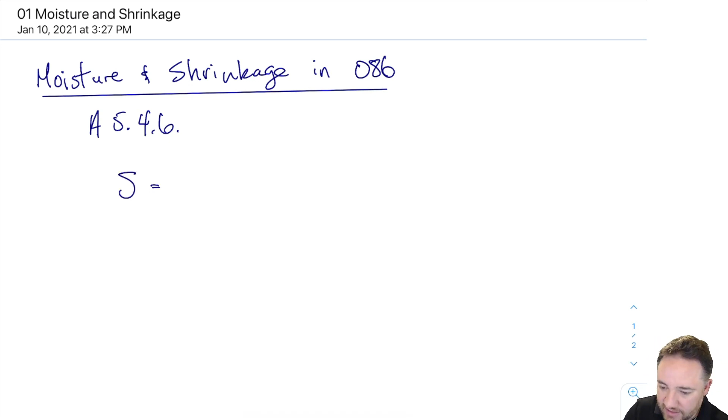But in order to calculate wood shrinkage, we use this very simple equation: S, which is the amount of shrinkage, is equal to D times (Mi minus Mf), which is the change in moisture content. D is the dimension that we're looking at, multiplied by C.

Okay, so S is the shrinkage or swelling. This is depending on if you have an increase in moisture content, which will cause swelling, or a decrease in moisture content, which will cause shrinkage.

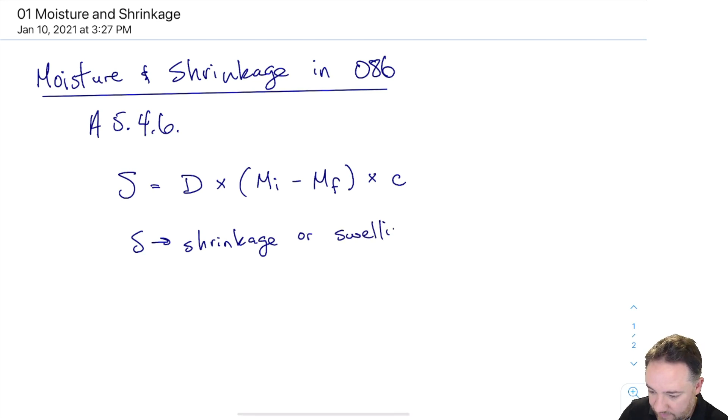In the dimension being considered, you'll recall that depending on which dimension you're talking about, whether you're talking about a cross-sectional dimension of a piece of wood or the longitudinal direction of a piece of wood, the shrinkage is different, and it's the C parameter that accounts for that. D is the dimension, so that will be either the width of your piece or the height of your piece cross-section, or the length of your element.

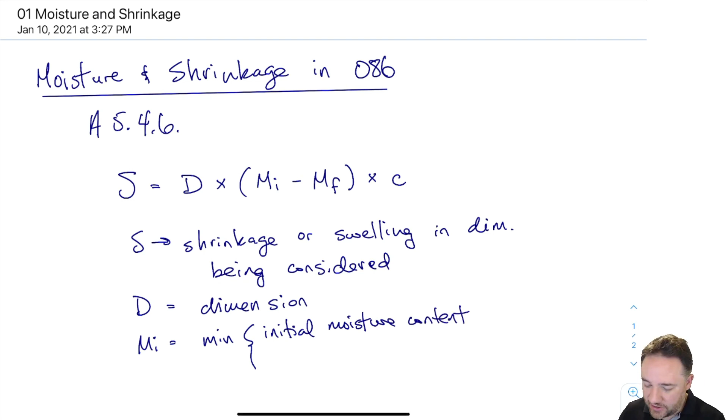And Mi is the minimum of the initial moisture content. So where does your moisture content start? Or the fiber saturation point, which we talked about before. Beyond the fiber saturation point, there is no shrinkage or swelling.

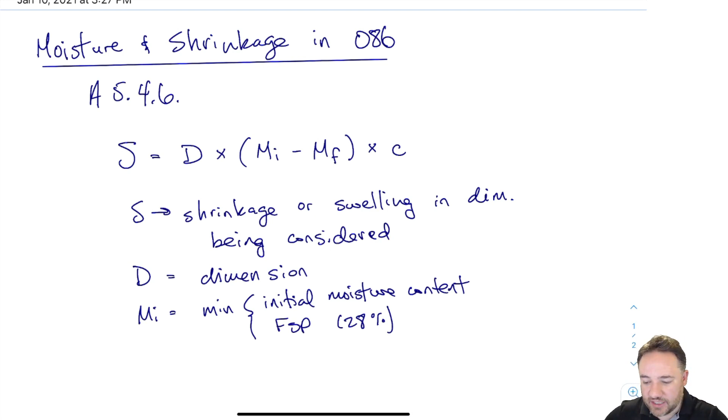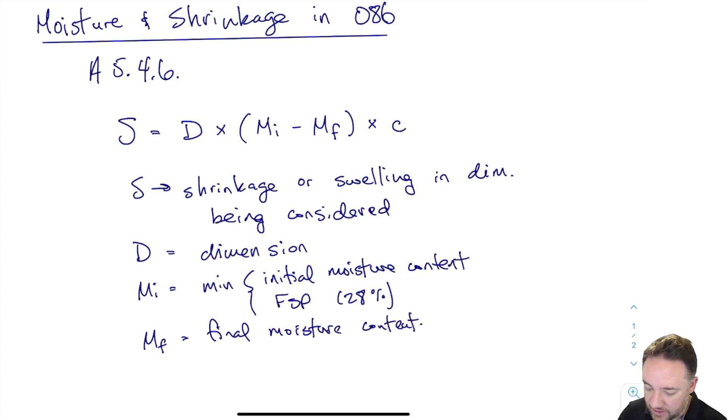So all of these are given in the context of a shrinkage. So Mi is basically the initial, Mf is the final moisture content, but you'd have to flip these in order to consider swelling. So this is final moisture content. Okay, and then the kind of most important part of this, which is how do we know how much it shrinks or swells?

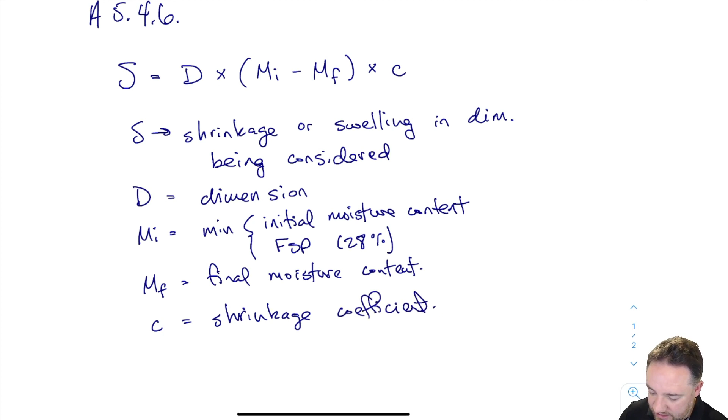We use this shrinkage coefficient, C, and that is equal to a different value depending on whether we're talking about perpendicular to grain or parallel to grain. So they give some categories for lumber, and it says in the standard, if you're using a different kind of wood product, then you'll have to look up either from manufacturer standards or some other way what would be the actual shrinkage coefficient for that product.

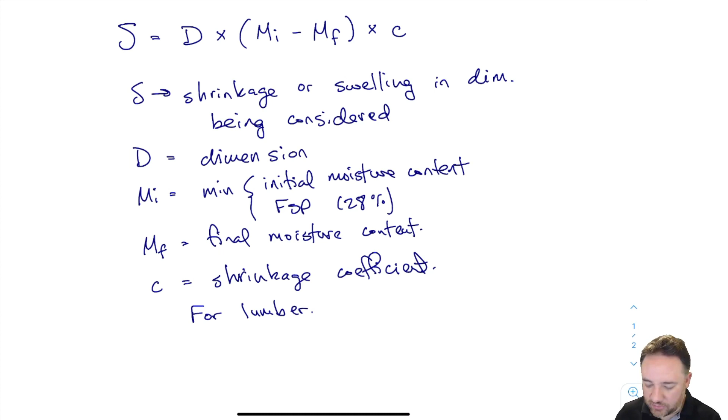But if we're talking about regular lumber, then it recommends that C is 0.002 for perpendicular to grain, and 0.0000405 for parallel to grain.

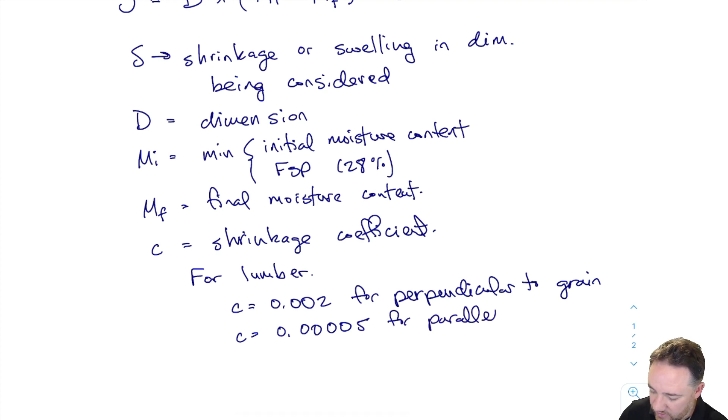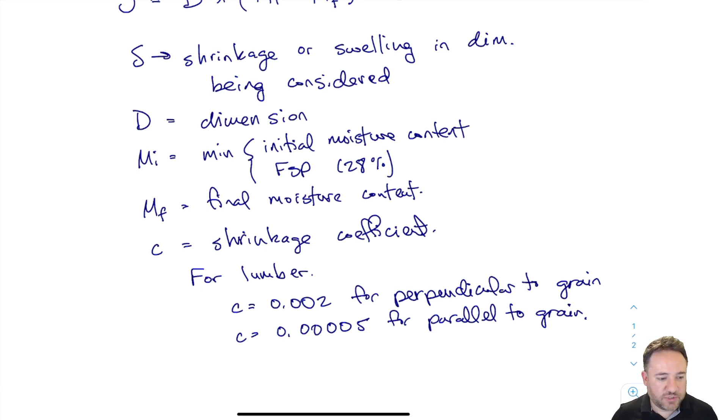So the perpendicular to grain value here is basically my cross-sectional shrinkage, either width or height of the cross-section, because those are the perpendicular to grain directions. And parallel to grain here is the longitudinal direction of the piece of wood. So you can see about an order of magnitude difference between these two, to the degree that probably in a lot of cases you can ignore the parallel to grain shrinkage and just consider the perpendicular to grain shrinkage, unless you have really long members.

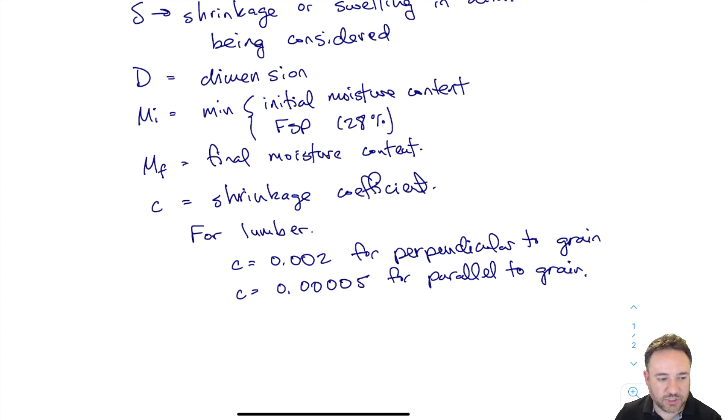And that's really all there is to it. So we just sub these things in. One thing that you need to remember is that Mi is given in a percentage, but we don't put the value in as a percentage. So for example, if I went from 28% to 12%, then what I'm actually going to put in is the number 16.

This is 28%, this is 12%, and that gives 16%. But I'm not going to put like 0.16 — I'm going to put actually 16, because these C values are given as shrinkage percentage per percent moisture content difference. So C is a shrinkage percentage: 0.002 here is 0.2% shrinkage, so it's 0.2, basically, times the length for each percentage change in moisture content.

So 16 is the number that I have to put if that was the case for 28 to 12. Now if I had 30 and went down to 12, my change in moisture content is still going to be 16 for the purposes of this equation. Why?

Because between 30% and 28% moisture content, there is no shrinkage, since 30% is past the fiber saturation point, and past fiber saturation point we don't get shrinkage. So if I went from 100 down to 12, it's still going to be 16% change in moisture content for calculating shrinkage, because from 100 down to 28 we don't have any change in dimension size. Then past 28 down to 12, that's when we actually get a change in dimension size.

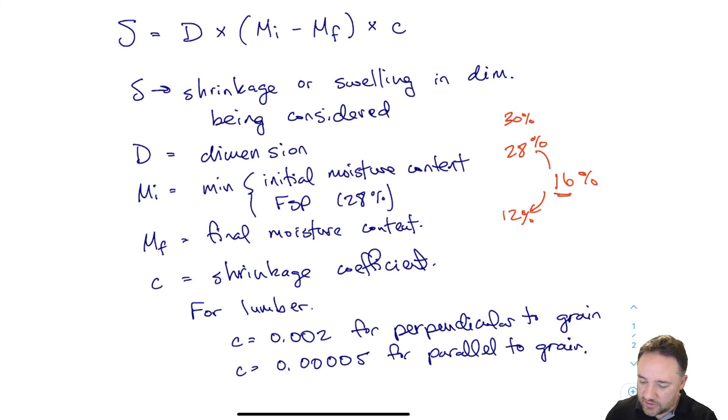So let's look at an example, starting with a very simple one, basically identical to the qualitative example from the other video about moisture and shrinkage, where we have this girder and a joist. The joist is going to shrink up towards the bolt because the bolt is restraining it from moving. So this is a bad design. We would really want the bolt to be down here if we could, because then only this dimension would be involved in the shrinkage. But that's not what we have, so we have to do this calculation to see if this is going to be a problem or not.

When this joist was installed, the moisture content was 19%. During service we're expecting it to drop as low as 5%, so we have a pretty dry interior area. After some time, the equilibrium moisture content of the piece of wood is going to go down to 5%. These are just example numbers. Where is there a gap going to form, and how wide will that gap be?

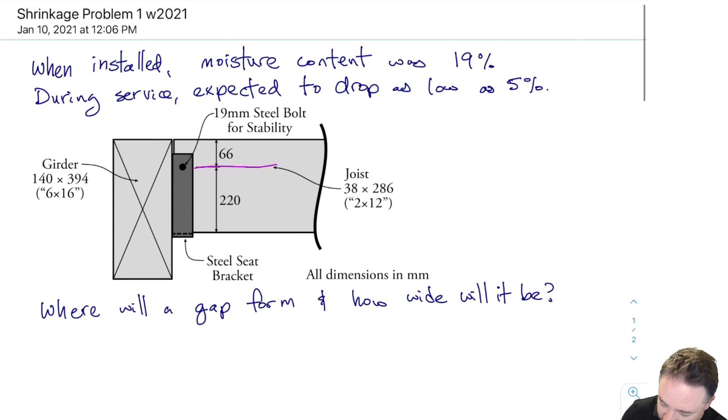We know from the previous video that this is where my joist is restrained, and it's going to shrink upwards from here and downwards towards here, because that's the level at which the joist is restrained—it shrinks towards the restraint. So basically the gap is going to form right here, and we want to know how much of a gap we're going to get. It's pretty easy to calculate.

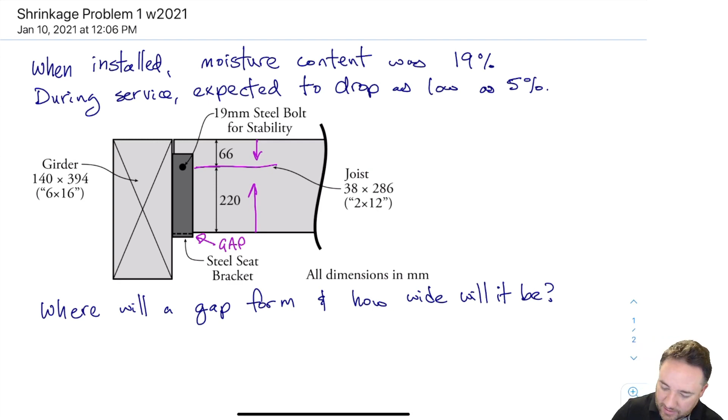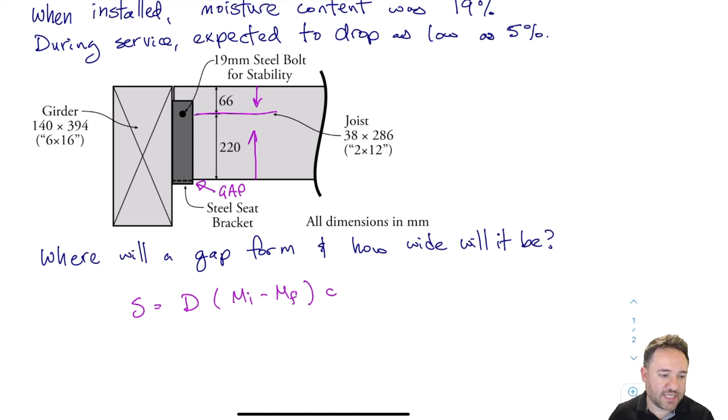So I have S equals D times (MI minus MF) times C. C is my coefficient of shrinkage, my shrinkage coefficient. D is the dimension we're looking to calculate—how much is that dimension going to shrink? And MI minus MF is my change in moisture content, which is going to start at 19.

Let's do the dimension first. So S equals, the dimension that's going to shrink here is 220, because it's going to shrink—the 220 dimension up top is what's going to shrink up to form the gap. MI is 19, MF is 5, because we're going from 19% moisture content to 5% moisture content, but I'll just leave the percents off.

C in this case, because we're talking about shrinkage perpendicular to grain—shrinkage parallel to grain would be this direction, the grain direction, and any other direction is perpendicular to that. So as a rule of thumb, as long as I can figure out my longitudinal direction, which is also my grain direction, any other dimension is perpendicular to grain. So up here is perpendicular to grain, and out of plane for this joist would also be perpendicular to grain shrinkage.

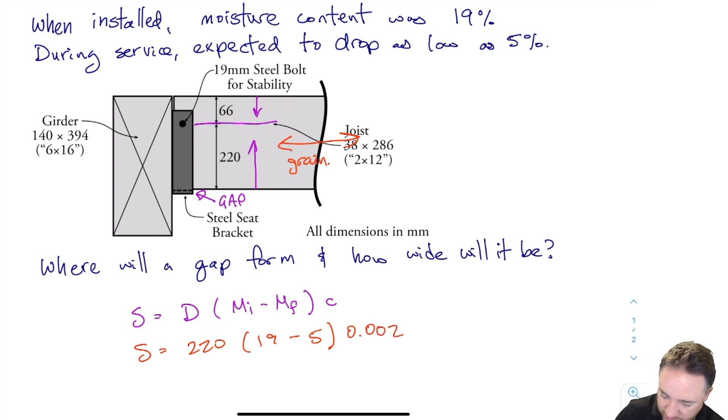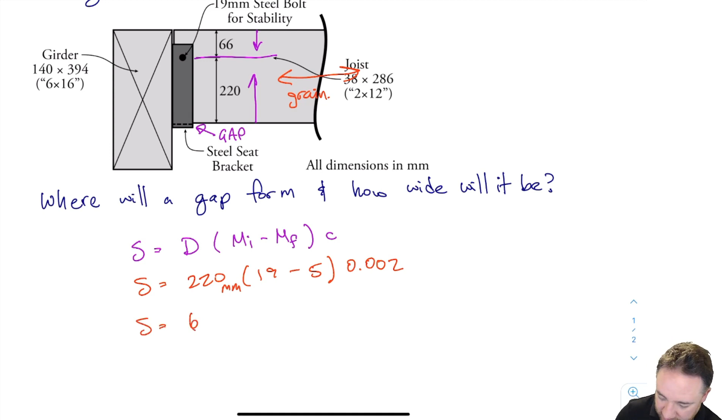Since we're talking about perpendicular to grain, my C is 0.002. Don't forget this 220 is in millimeters, and 0.002 is percent per percent, basically, and 19 minus 5 is also percent, so these don't actually have units associated with them. So S is going to equal 6 millimeters if I calculate that out. That's my final answer.

So basically what's going to be left at the gap is going to be a 6 millimeter gap. If that can be accommodated by construction tolerances and holes around the bolts and stuff like that, then we're going to be fine. But if it doesn't, then we might be in trouble, and it also depends on how stiff the wood connection is at the bolt.

Now, bolt holes are typically only about 2 millimeters bigger than the bolt, so we might have 2 millimeters of space to play with to accommodate that kind of shrinkage, but 6 millimeters is probably going to be too much. So this connection is probably going to have a problem, and we should redesign it to move the bolt down to somewhere lower. Okay, looking at a second example.

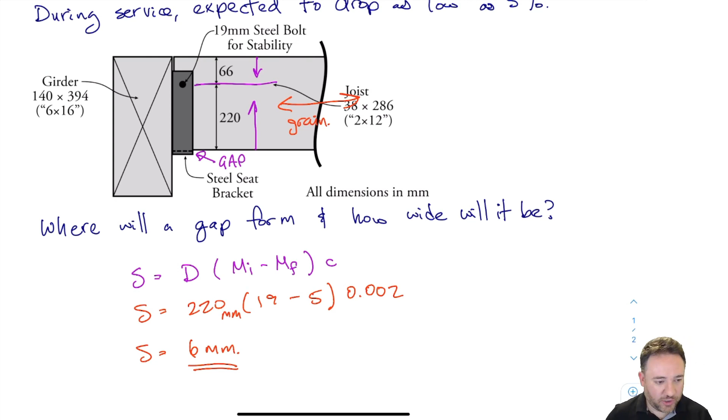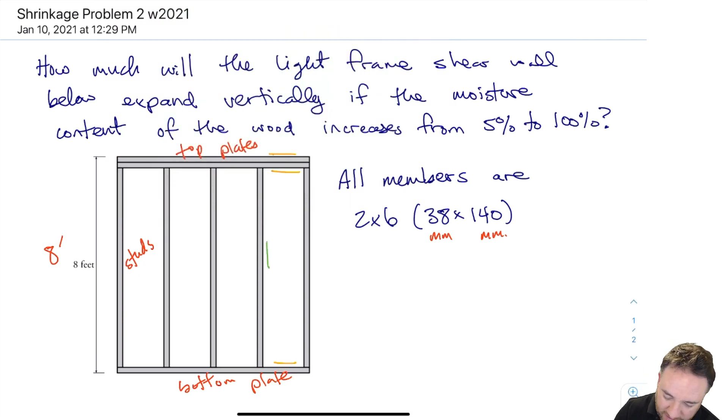So let's get started. We have horizontal members and vertical members—these orange ones are horizontal, horizontal, and horizontal. So we've got 3 different horizontal members and 1 vertical member. If I'm looking at a vertical line, I have horizontal, horizontal, vertical, and horizontal—3 horizontal members and 1 vertical member along the height of this wall.

I want to figure out how much each of these layers is going to expand. All the horizontal layers are the same width, so I'll make that calculation once and multiply it by 3. For the vertical one, I'll have to figure out the height of that stud and how much the elongation is.

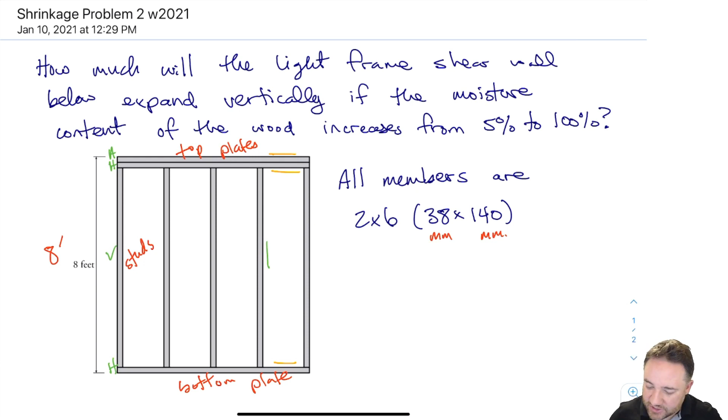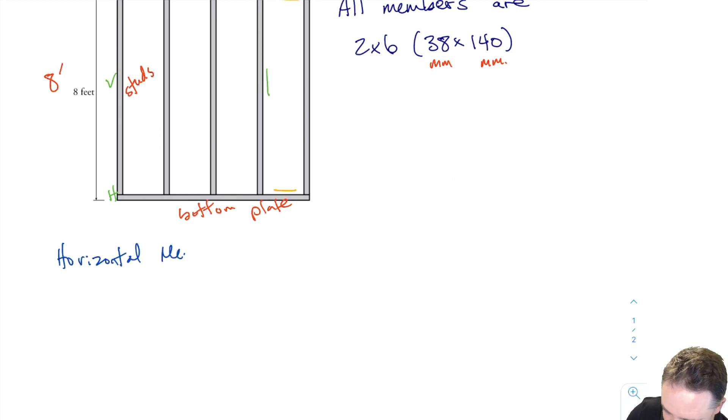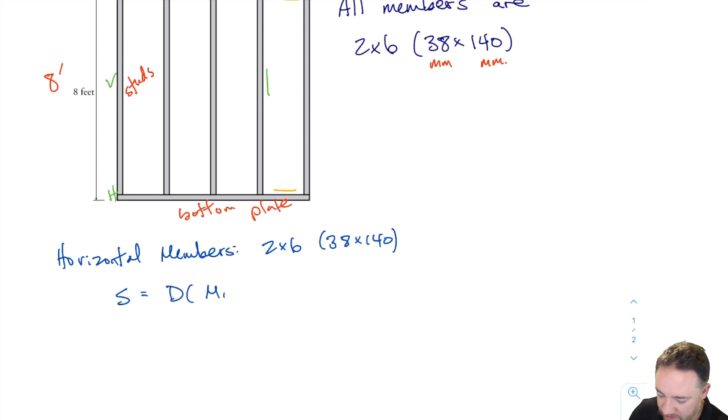If I'm looking at the horizontal members first, which are 2 by 6, 38 by 140, which we know from above. I have S, my shrinkage, equals D times (MI minus MF) from the appendix to the standard, multiplied by C. In this case, D is equal to 38 millimeters.

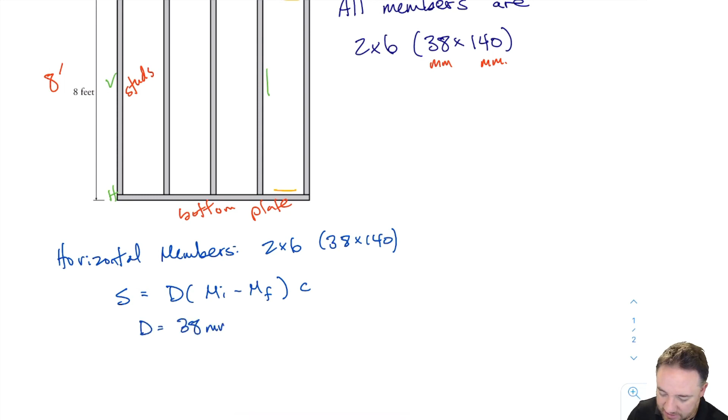These studs—you have to understand a bit how these walls are put together. The plates are laid on the flat, so each of these, this dimension is 38, and the 140 is out of the page. So these are laid on the flat, just like the vertical studs are also 140 out of the page, with a width of 38.

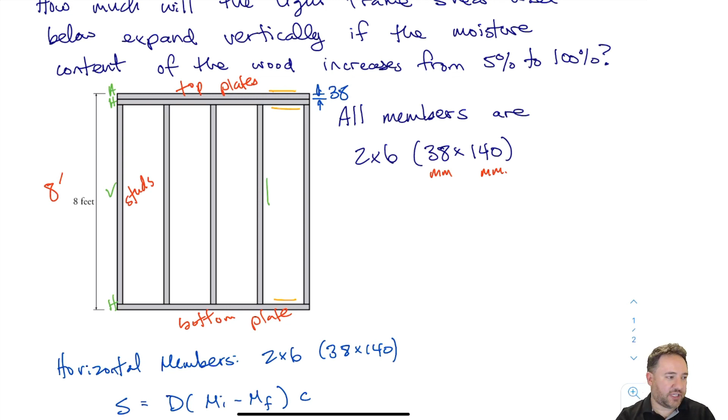So I'm looking for the vertical dimension along this height. If I'm talking about the horizontal member, it's lying flat like this—38 in this dimension, 140 in the out-of-plane dimension. So the dimension I'm interested in is the 38, the thickness, which is the dimension that's going to expand or contract.

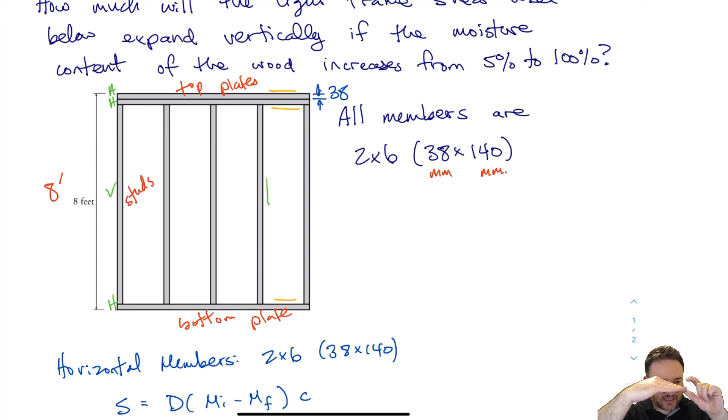In this case, expand. So if that's 38, then C in this case is going to be 0.002 because we're perpendicular to grain—perp for short. Because I'm expanding a width or height of the cross section, not the longitudinal length of the section.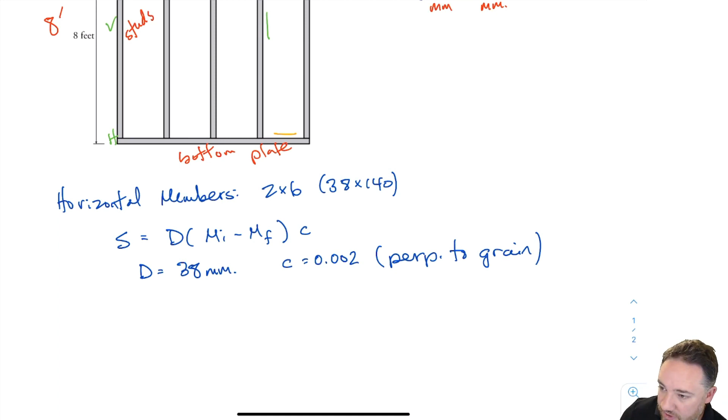So therefore, what's my S? It's equal to 38, my dimension, times MI minus MF. In this case, my MI is 5—I start at 5—and then I go to 100. But I'm not going to put 100 here, because past the fiber saturation point there is no swelling. So I can only swell up to the fiber saturation point, which is 28, and no further. So I don't put 100 here. And C is 0.002.

So if I calculate that out, I'm going to get negative 1.75 millimeters, because the D was 38, which was in millimeters.

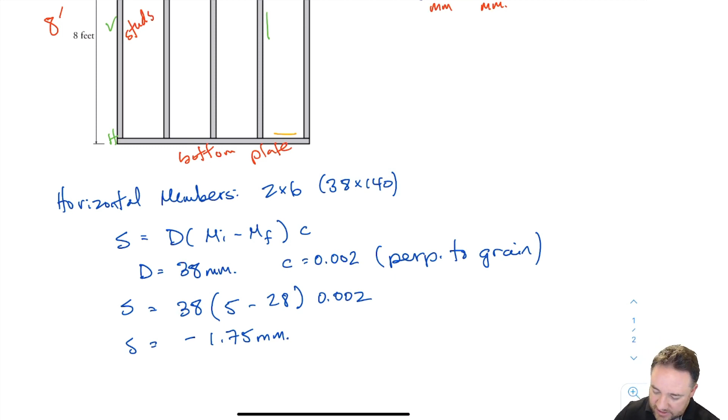If that D was in inches and I did this calculation, it would still work—I'd just get a number out in inches. So here the negative is just an indication that this is swelling, but I wouldn't get too caught up about the pluses or minuses. The best thing is to understand what's happening, that we're going from low moisture content to high moisture content. I could have just as easily put 28 minus 5 and said it's swelling, because I know that it's swelling.

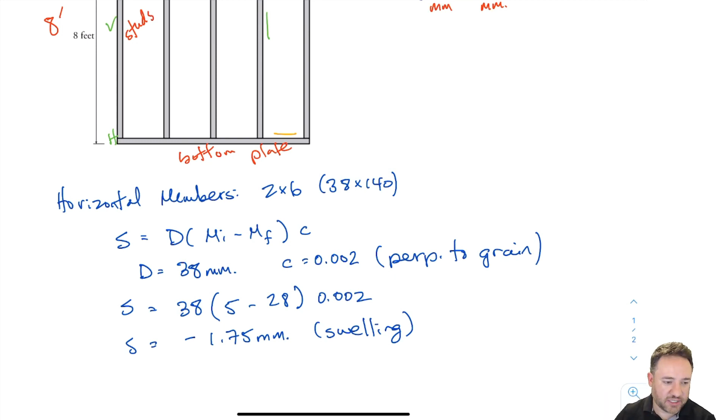Okay, so that's how much each horizontal member is going to swell by: 1.75 millimeters.

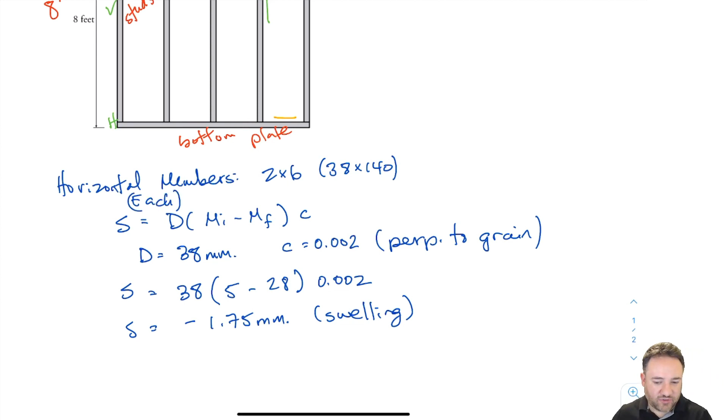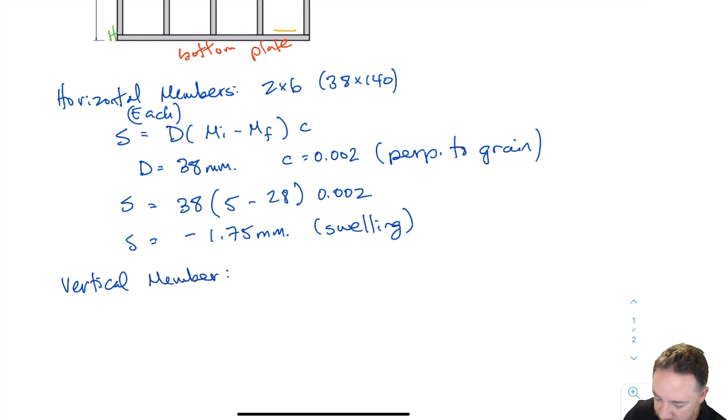Now, what about the vertical member, which is also a 2 by 6, 38 by 140? In this case, we need to know the height of the member because we're looking to calculate the elongation in the vertical direction. We need to know this height here—this is the length of the vertical member. So how do we find that?

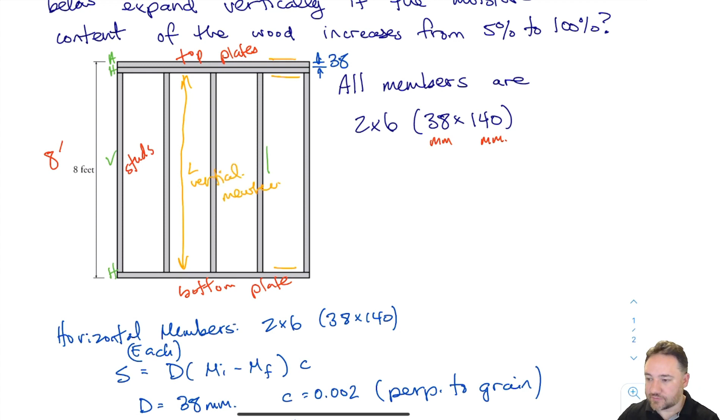The total height is 8 feet. Then we subtract 38 at the top and another 38 at the bottom, and that's how we're going to get the total length of our member.

Just to remind ourselves how we convert feet to millimeters: we've got 12 inches in a foot, and each inch is 25.4 millimeters. That's something you really have to memorize, because especially in wood construction we sometimes run into things that are in inches instead of millimeters, and we need to know how to convert them. Just remember 25.4 millimeters per inch and you'll be just fine.

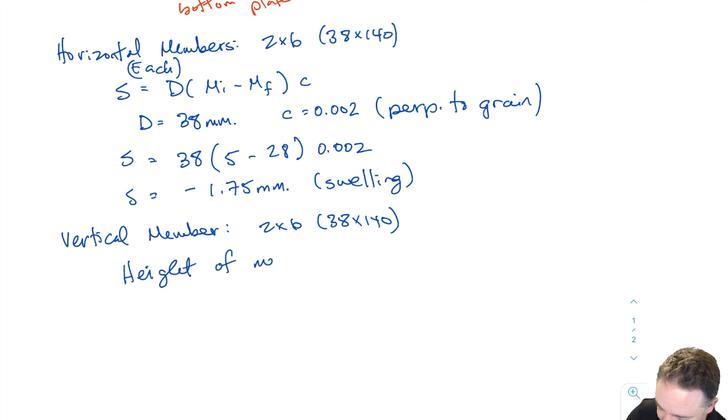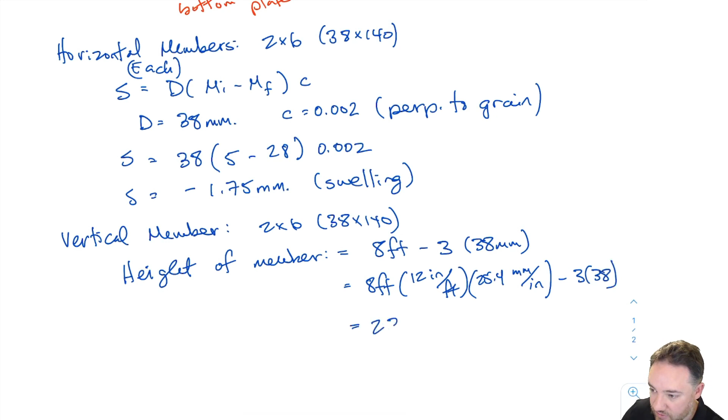So what's the height of this member? It equals 8 feet minus 3 times 38 millimeters. Let's get all those into the same units: 8 feet times 12 inches per foot times 25.4 millimeters per inch, minus 3 times 38. If I calculate that all out, I get that the height is 2324 millimeters.

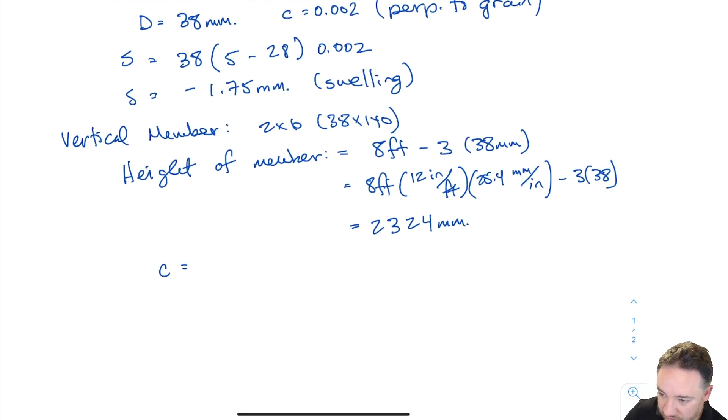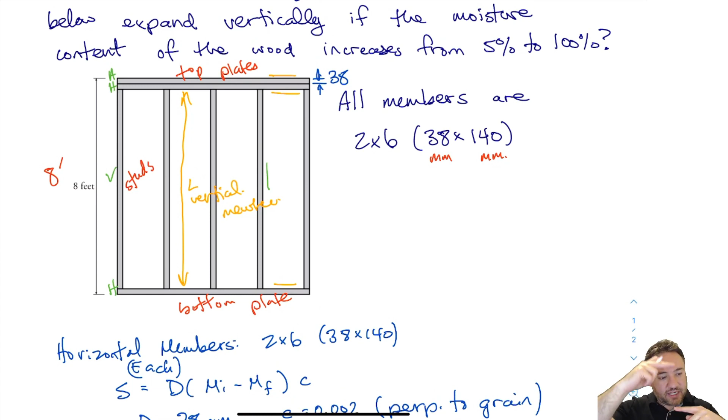Now that I know the height of the member, I can calculate the shrinkage as long as I use the right coefficient. The coefficient I'm going to use in this case, since it's longitudinal shrinkage—the member shrinking along its own length, so it's in the grain direction, the parallel to grain direction—I'm going to use 0.00005 because that's the parallel to grain shrinkage coefficient.

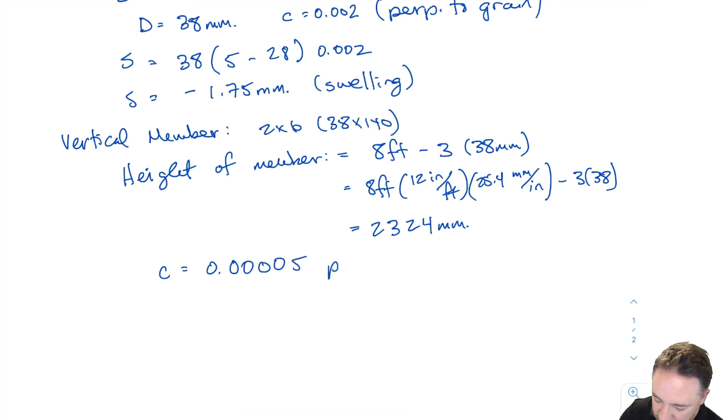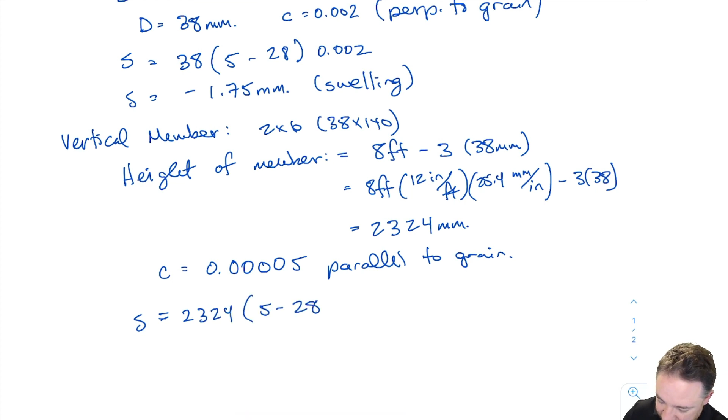And if I do that calculation, I'm going to have 2324, which is my D, 5 minus 28 again, and 0.00005. What I get is 2.67, and I can put a negative on there, millimeters, which is swelling.

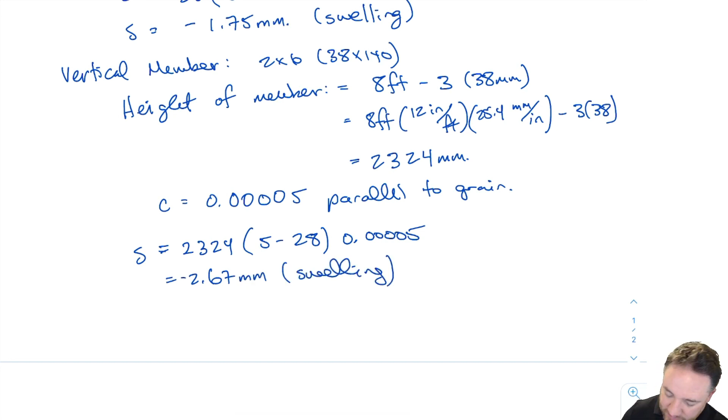So you can see that the shrinkage for the top plate and the bottom plate is 1.75 millimeters each, even though they're just 1.5 inches. And the shrinkage of the vertical member, which is much, much longer, over 2 meters long, is only 2.7 millimeters.

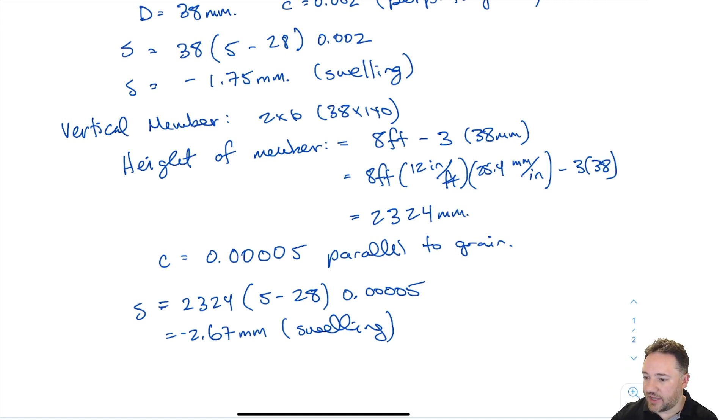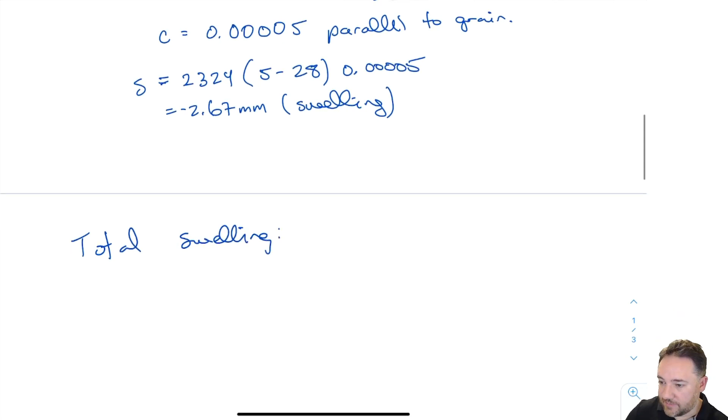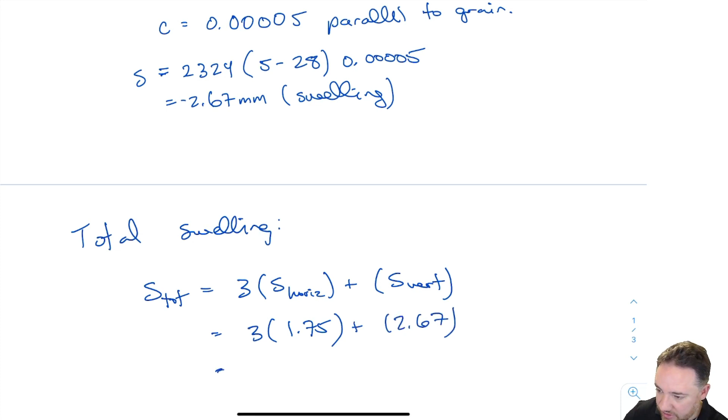So if I want to now find the final total swelling, S total is going to equal 3 times S of the horizontal members plus S of the vertical member. We get 3 times 1.75 plus 2.67, and all those are in millimeters, giving us 7.92 millimeters, which is equal to about 8 millimeters of swelling.

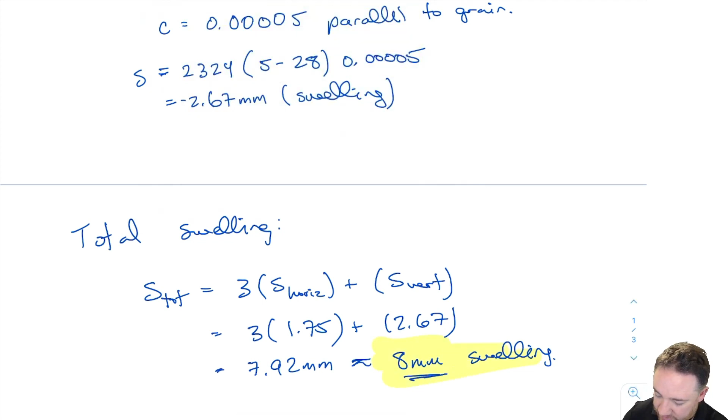So that's my final answer. Now, is there any point to saying 7.92 millimeters? If you do this on a test or exam, or if you're working as an engineer and you go to your boss and say, 'I've calculated this swelling and it's going to be 7.92 millimeters,' then everybody's going to laugh at you, because there's no way we know the swelling to that accuracy.

I think for shrinkage like this, probably one significant figure is enough. Remember, the actual shrinkage coefficients—there's a difference between longitudinal, radial, and tangential shrinkage, like we saw in the moisture content video, and we don't know which direction it is or what combination of directions it's in. It depends on how the lumber was sawn from the log, whether it's quarter sawn or whatever. In addition, the actual shrinkage coefficients are also very rough numbers—you'll see coefficients like 0.002 and 0.00005 each only have one significant figure because we don't know them that well. They're only approximations.

So that's all there is to basically know about shrinkage for the purposes of this course, and we're going to follow up with another example in the live session that we can do together.